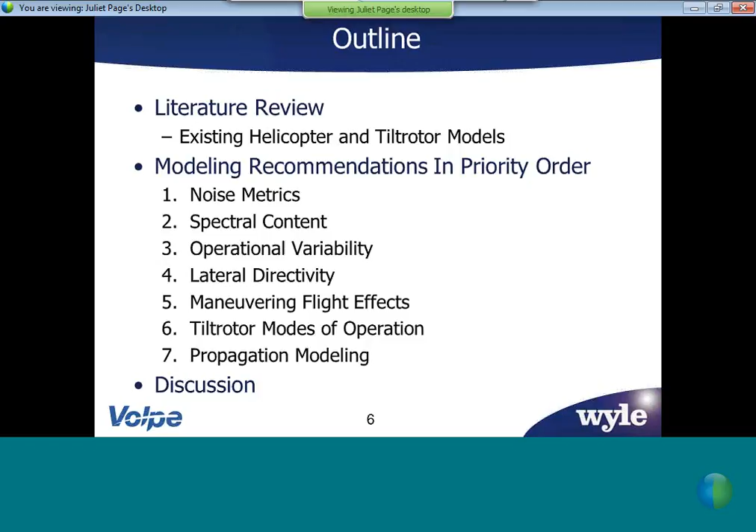Okay, so back to the models that are out there. There's a wide spectrum of models. I'm kind of using air quotes here around the word models. Everything from very simple operational guidance in the form of the graphics from Fly Neighborly. That in and of itself is a particular model for helicopter noise.

All the way through integrated models, simulation models, then there's first principles calculation methods that utilize a combination of computational aeroacoustics and dynamics models together with one another. And those are much more complex, and have a lot of input burden in terms of what information you need to even run the models. So there's this wide spectrum of models out there. They all have their pros and cons and varying degrees of accuracy and user input burden.

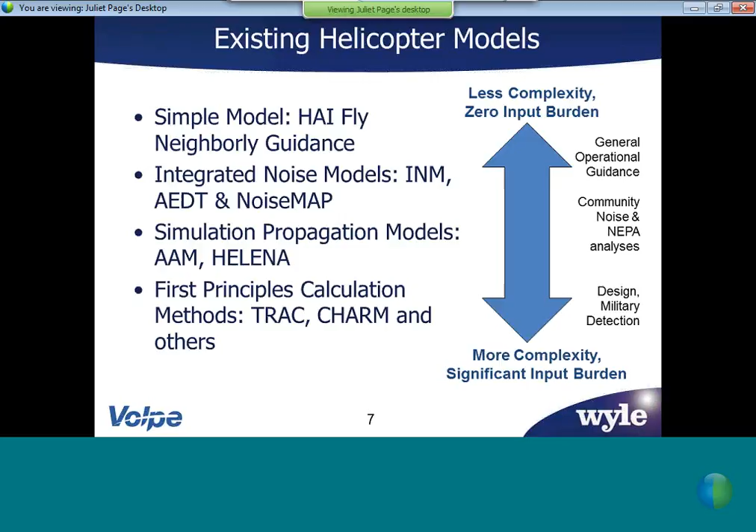And so in this project, we reviewed all of those. And since we're targeting AEDT, the integrated noise model, sort of in the middle, that a community noise modeler can use and have access to the data to use. Some of the higher fidelity models are very good for assessing, if you improve this or add this feature, what does that do to your answer? So anyway, let me just step through them quickly.

So as I mentioned, this is straight out of the Fly Neighborly Fly Higher chart, and it is a model. It's a very simple model where you look at your height above the ground and whether you're a small or large helicopter, and there you get your noise level out. Very simple, very easy to use, and a lot of people find this very valuable.

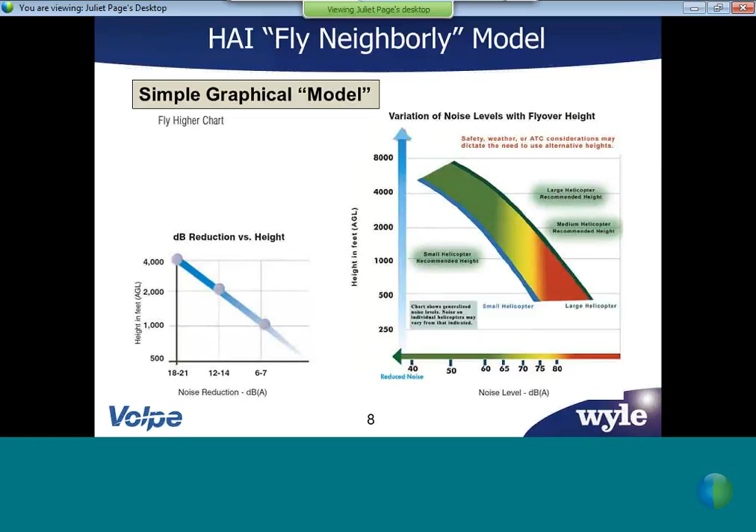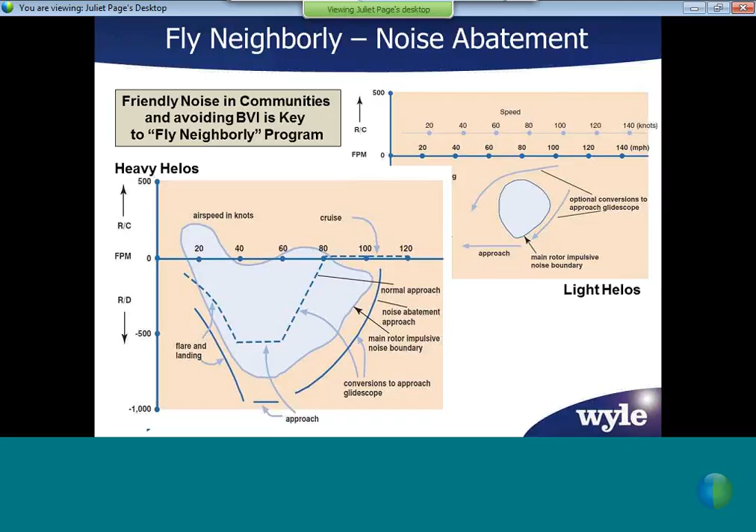Stepping up a little more complex, you can account for the BVI, and the HAI Fly Neighborly program also provides information to the pilots so that they can start to understand some of the noise source emission and can be aware of the community noise aspects.

Then we get to the integrated noise models. INM, which I'm sure many of you have been using over the years, as well as AEDT, which is the current FAA model. INM will be sunsetting in the future, so everything will be moving to AEDT. But that's an integrated model, and it has a GUI with it, and the user can define the operations, select the vehicles.

It comes with a built-in database, and there are some limitations to the fidelity of the source, the modeling, and the operational modes within that model. And this is where the crux of our recommendations are targeting. So what particular aspects of AEDT can be improved in the future to have better, more accurate noise results coming out.

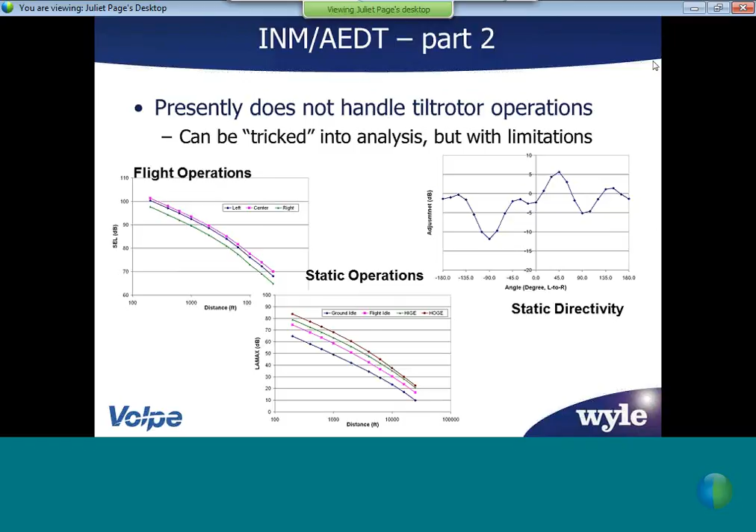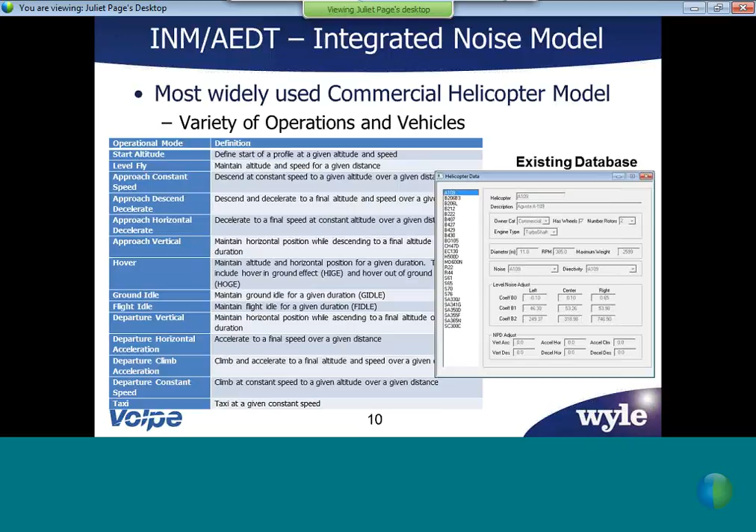So here's some of the limitations of INM and AEDT, which you guys are probably fairly aware of. It doesn't handle tilt rotor operations. You can sort of trick it to do them. It ain't pretty, but you can get some answers out. But as well, on the helicopter side, there's limitations on the directivity of the model. So you can have a left, center, and right directivity. There's built-in spectral classes. And there's a finite number of just a couple of different operational modes which have specific noise data with it.

So moving on to the next layer fidelity model, you get into simulation models. The Rotorcraft Noise Model and Advanced Acoustic Model at Wyle are examples of those. And I was instrumental in the development of those for many years before I went to Volpe. So these have at their core noise spheres, and you have one noise sphere that represents the 3D spectral emission for every single type of flight operation or flight condition. You can also handle stuff like maneuvering and other aspects which are a little more complex than what is currently in AEDT.

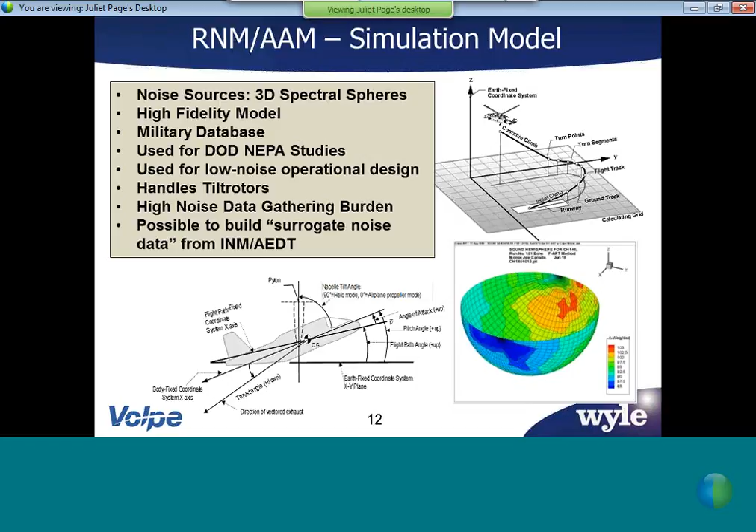There's also HELENA, which is an EU model. There's a lot of similarities between HELENA and the Rotorcraft Noise Model and AAM in the US. They are both time-based simulation. HELENA can utilize noise spheres, and it has the ability to handle noise carpets as well. And NLR in our team is one of the supporters or co-developers of the HELENA model.

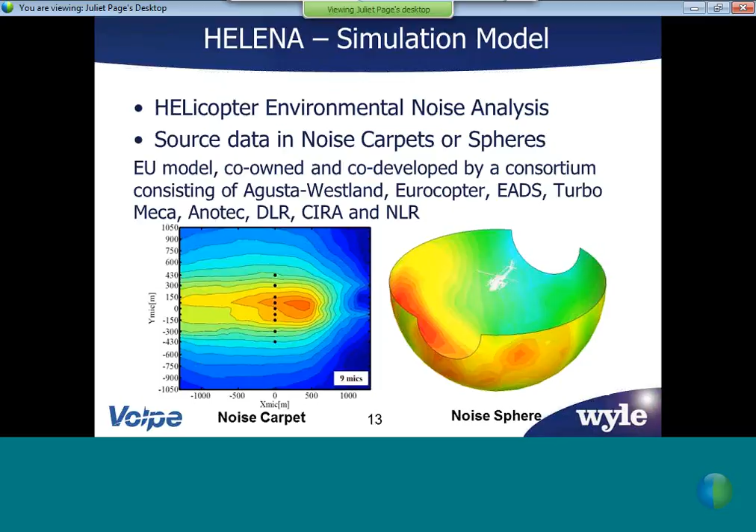Now, stepping to a little more complex process, there are tools like TRAC, the Tiltrotor Aeroacoustic Code, which is a NASA tool that is a hybrid code that uses computational structural dynamics along with computational fluid dynamics, and it has the capabilities coupled together. To utilize these types of models, you need a lot of information about all the blades and the airfoil shapes and the blade dynamics and properties, and there's a whole lot of information you need to be able to utilize these types of models.

And they're great for research and for analysis and other things, but it's way more data than your typical community noise modeler that's doing some sort of a NEPA assessment at a heliport or an airport or some other location would have. But these are very instructive for development of data and understanding the high fidelity physics.

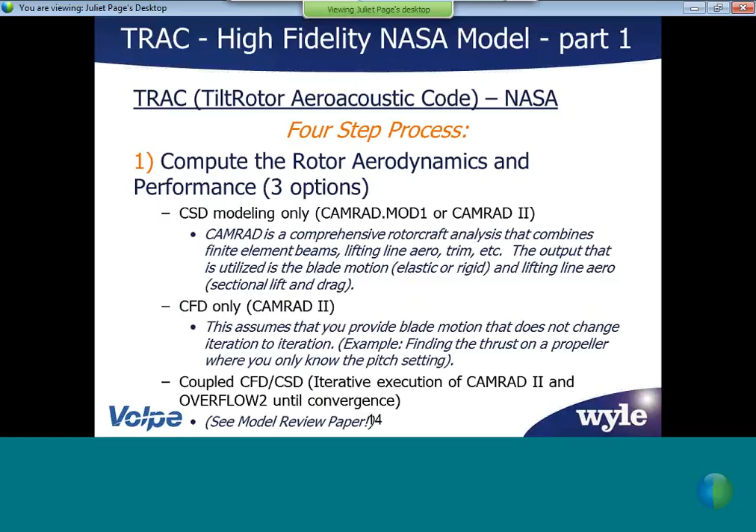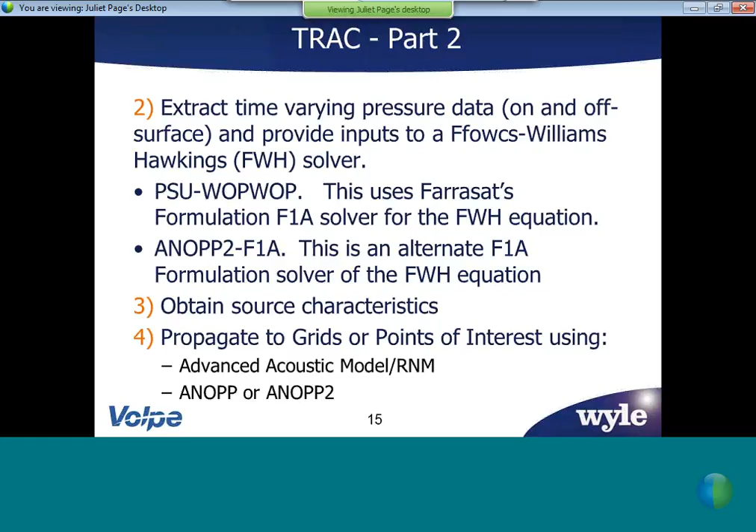So they work generally by starting with the rotor aerodynamics and the performance, and then they're coupled together, and you extract the time varying pressure, and use a Ffowcs Williams-Hawkings solver like WOPWOP or PSU-WOPWOP or ANOPP, which has Farassat's formulation in there. And from there you can obtain the source characteristics, either propagate it straight down to the ground, extract a noise sphere, what have you. And then these higher fidelity models can be used analytically to generate noise source characteristics that can then be used in the lower fidelity models as well.

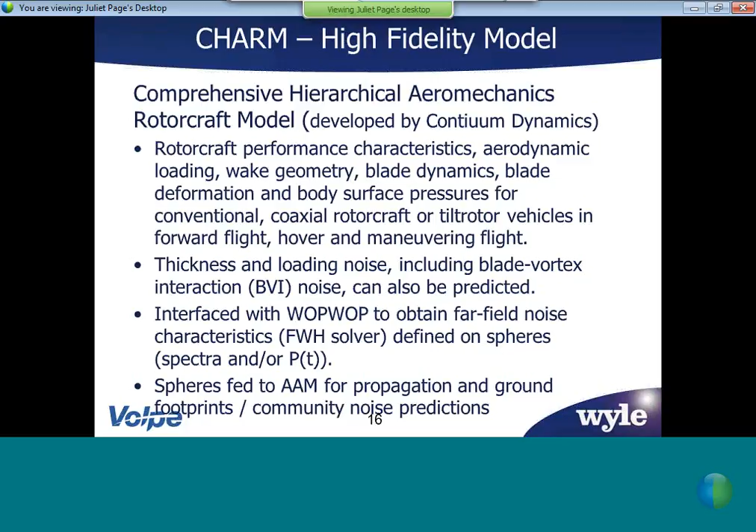CHARM is another example of a high fidelity tool. This one is developed by Continuum Dynamics in New Jersey, and it also has the capability of doing the aerodynamics and the blade structural dynamics, and from there extracting the noise characteristics. You can propagate straight down to the ground or feed them into a propagation model that takes into account additional atmospheric and intervening environmental parameters for the propagation. So there are many others out there. I just picked a few to show you. CHARM has the ability to also handle multiple rotor systems and other kind of cool looking crazy vehicles.

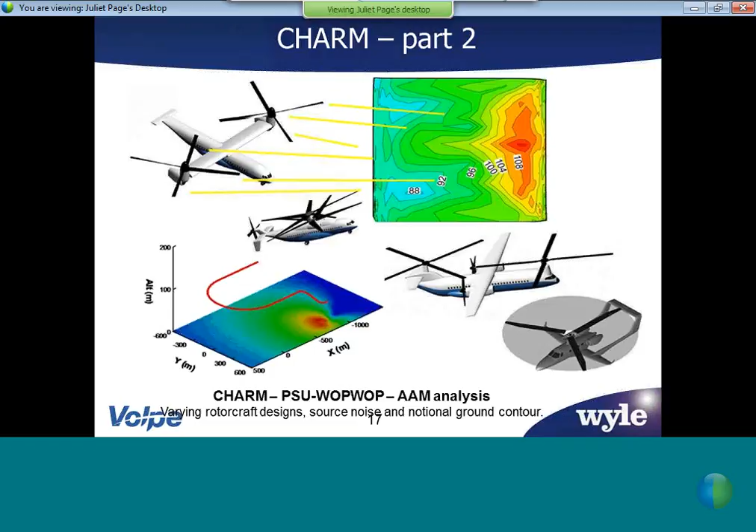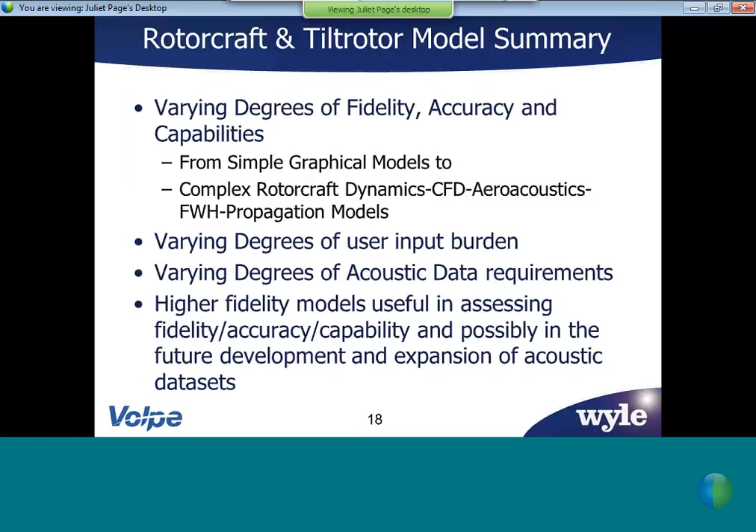So, as I mentioned all along, there's varying degrees of fidelity, accuracy, and capabilities of the models that are out there. And we're targeting community noise modeling. So again, with a lot of these models, it's good to understand them. It's good if you have access to them, if you need to develop databases or you have a limited empirical database and you want to augment that with some analytical stuff in between. Now I'm going to move on to our recommendations. And I have 7 slides for each of the key recommendations, and I'll go through each one of them in order.

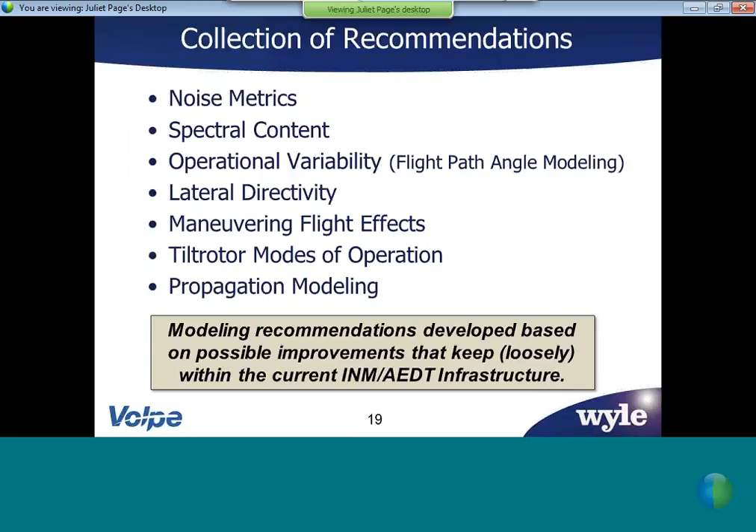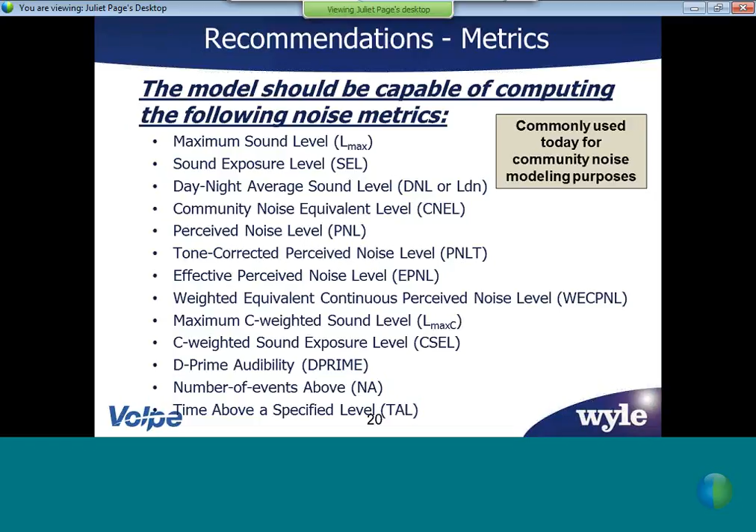Okay, moving on to the next priority here was spectral content. So the current model of INM stops at 50 hertz and goes up from there. And as you're all likely well aware, the fundamental noise for helicopters is generally below 50 hertz. There can be some significant differences in the computations.

If you do not include the fundamental and the first few harmonics of the rotor fundamental, when you're computing C-weighted, unweighted, metrics like D prime, which is an audibility metric that occasionally is used for Grand Canyon and National Park studies. So there can be significant differences. So that is the genesis for our recommendation that spectral content be included in the model down to and including 10 hertz, 1/3 octave band.

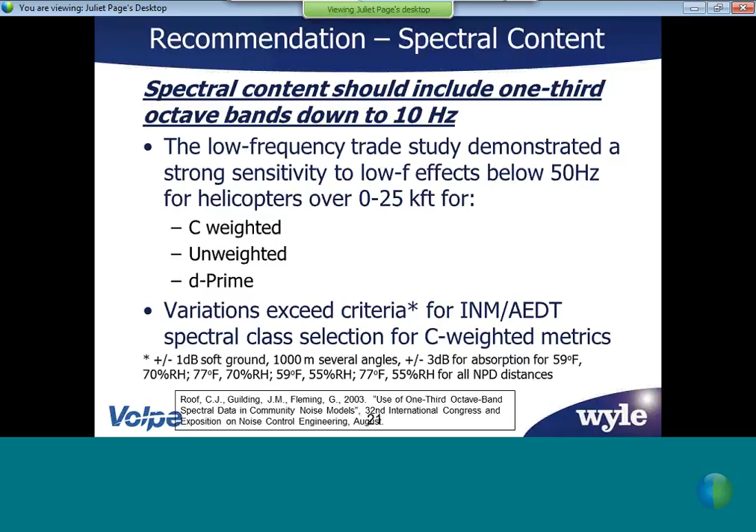Here's an illustration for those of you that may not be fully plugged into the A and C weighting details. On the lower left here, I'm not sure if you can see the pointer, but this is the C weighting curve, and this is essentially the weighting that gets applied to each frequency, and then the noise gets integrated across all bands. A weighting drops off significantly at the low frequencies.

A weighting is essentially a capture of the human ear and human hearing, and we don't hear a whole lot of the low frequencies. Whereas C weighting is often used to determine vibration and structural response for buildings and things like that, and they do respond well to low frequency noise. So it's fairly flat all the way down, well below 50 hertz, and then it starts to roll off. So all of this energy in the purple area is not currently included in the C computations in INM.

The current version of AEDT does have inclusion of capability to go down to 10 hertz. The databases are going to need to be expanded, though. On the right-hand side, I'm just showing an example of a spectra for the Bell 412 and the Canadian Forces CH-146 vehicle that was measured at Moose Jaw. This is publicly available data with the Rotorcraft Noise Model, and from there you can see the peak noise, the fundamental for low speed and high speed, is well below 50 hertz.

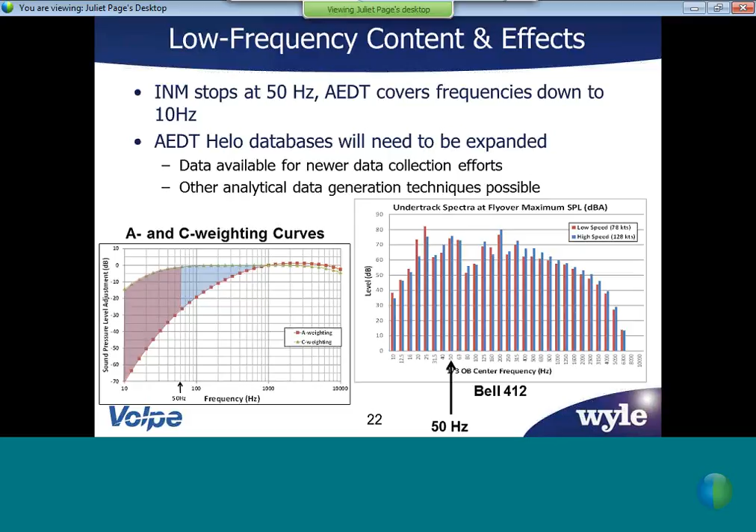Okay, moving on to the next recommendation. This is flight path angle. So we recommend that it's necessary to include the effects of approach flight path angle on source noise characteristics. So, as I'm sure I'm preaching to the choir here, BVI on approach is a major noise emission condition, and helicopters generally on 6 degrees approach, they're at maximum BVI. Obviously, there's configurational differences and operational differences, but generally there's a peak around 6 degrees.

If a pilot flies a low noise approach at 3 degrees or 9 degrees, they're off the BVI maximum, and their noise source emission, looking at the source characteristics, is lower. The way the AEDT and INM model is currently structured, it has one set of approach noise characteristics per vehicle.

So if you are attempting to model a low noise approach or design a low noise approach for your facility that will reduce the noise on the community or reduce the contour size in a particular area, you're never going to be able to see the benefit of that in the model the way it is currently structured. So that's the primary rationale behind a recommendation that you need to include approach flight path angle source characteristic variability within the model. Otherwise, you're kind of throwing the baby out with the bathwater, so to speak.

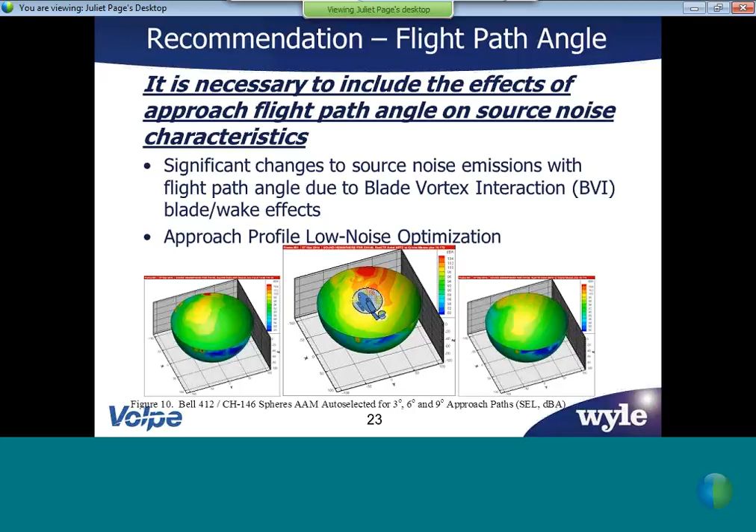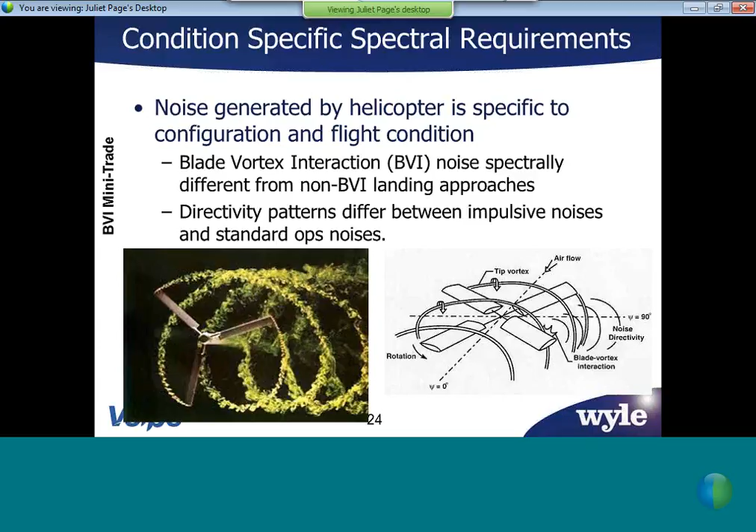Okay, we also feel that it's important to include the spectral characteristics along with your approach noise. So the current implementation in AEDT is to have a single spectral class for approach, one for departure, and one for level flyover. Because the BVI noise versus the non-BVI conditions can have dramatically different spectral characteristics, it's important that you permit the spectra to change and not just the overall level to change as a function of flight path angle.

Those are just some cool photos of BVI, what it is, when it occurs, and why. I'm not going to get into a whole lot of detail on that here. We don't have hours and hours to go through BVI noise, but there are conditions, different loading, flight path angle, drag or thrust state of the vehicle that can affect the relative angle between the rotor wake and the blades, which will impact BVI or not. So it can be condition specific as well as vehicle specific. And it's important to be able to capture that adequately.

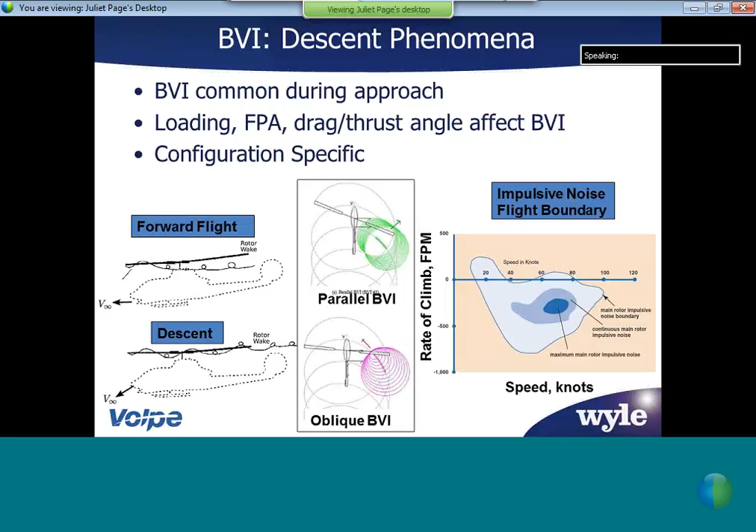Okay, moving on to the next highest priority item is lateral directivity. So the noise emission from helicopters is fairly complex. It is not symmetric like fixed-wing aircraft. The current AEDT and INM models were developed to have a limited amount of lateral directivity. They recognized that the right, the center, and the left are different for helicopters. So it has essentially 3 lateral directivity points: center line, directly under track the vehicle, right and left, which are defined at a 45-degree emission angle.

If we look at the higher fidelity noise source emission of vehicles, the peak may not necessarily be at 45 degrees, and there is often noise emission that is at higher angles heading up the side of the, if you picture the sphere, heading up towards the rotor plane. You know, if you're flying above uniform flat Earth, those probably aren't a big deal, but once you start to bank the helicopter or try to do an analysis where you may have terrain or helicopters flying below the height of nearby canyons or other features, you've again missed a lot of the noise characteristics. And we feel it's important that the model do have more lateral directivity fidelity in it.

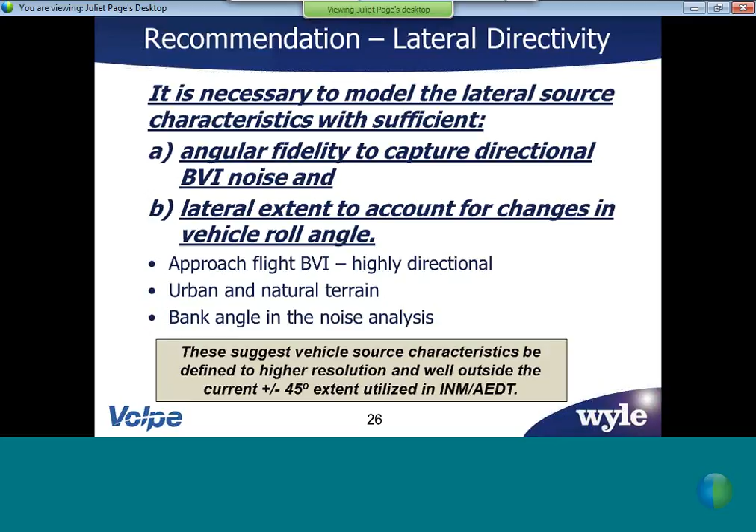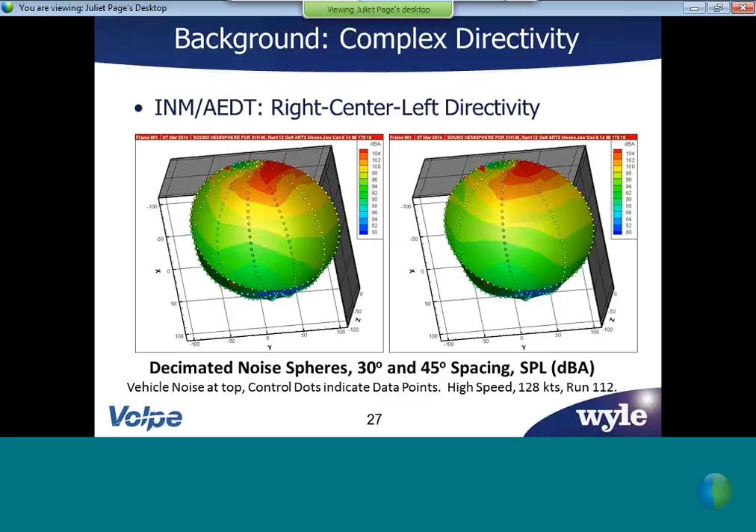So here's just a few examples. One of the analyses we did was take the high fidelity empirical noise spheres, essentially decimate them, lower and lower fidelity, and assess what the impact was on the contours and integrated noise metrics, and use that to quantify some of the differences of including it versus not including it. And a lot of the details of this are laid out in the white paper. Right now I'm just going to give you a pretty high-level overview.

So you can have a single event dBA level off by upwards of 7 dB, just by neglecting to include some of the lateral directivity effects. And again, this is just one example, one flight condition, one particular thing. There's some more examples of this in the white paper. But this is the genesis for that specific recommendation, that one needs to include higher fidelity lateral directivity in the model to more accurately capture the noise.

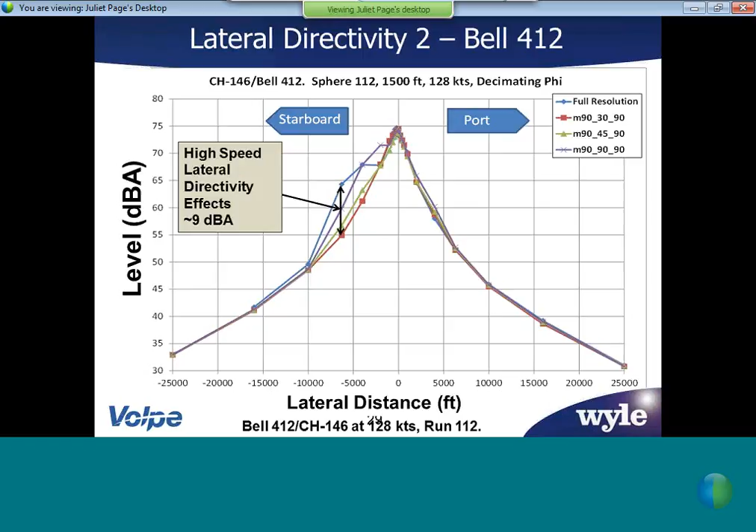So there are implications to this lateral directivity modeling recommendation. Our suggestion is that we leave it up to the manufacturer to define what angles need to be prescribed. That is going to be very vehicle and condition specific, and the manufacturers probably have modeling that they've done in-house to better ascertain this.

We think that the criteria for saying how many lateral directivity positions or angles need to be defined should be parallel to some of the current FAR 36 language that specifies how different things can be between the lateral microphones to capture the maximum. So there's probably some current language out there that could be woven into this lateral directivity recommendation. And if anybody has suggestions, we welcome your input on that.

For level overflights, left, center, right might be okay, but the peak might not be at 45 degrees. So rather than just having the finite left, center, right at 45 degrees, say, okay, here's the left, here's the center, here's the right, and specify what the angle is. We've had some preliminary discussions with the AEDT developers about what that would require in terms of modifying the tool to handle N angular locations, and the NPD metrics would then be at each of the N angles, and possibly have an N maximum or something like that.

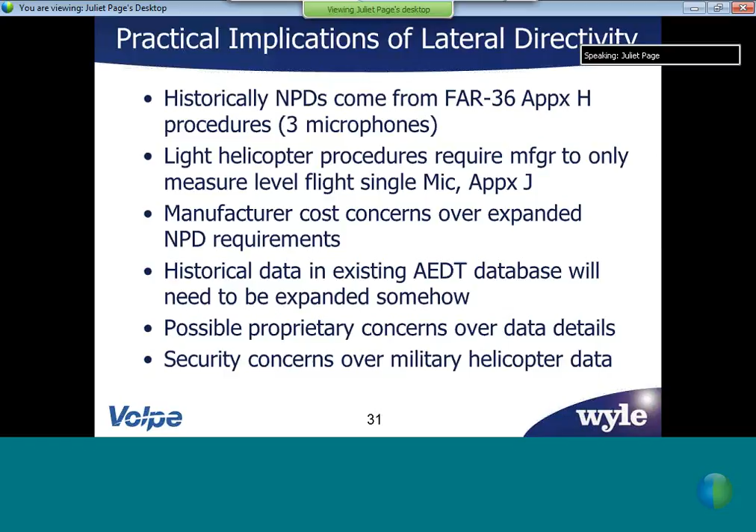Okay, the next recommendation, and this is a little bit of a softer recommendation, is that the model should be structured so that it can handle maneuvering flight. There's a couple of different categories of maneuvering flight here. So one of the pieces we feel it's important that a community noise model capture is the ability to model optimized low noise profiles. So for example, if you have a drag device that you're putting on there, like Fred Schmitz's X-Force, you can avoid BVI. Or if you have some other vehicle designs coming down that will take into account different drag states or what have you, that you can actually include the source characteristic modification.

Now, that's not to say that the database needs to include all of these things, but you need to give the user the capability that if they're attempting to model a scenario at a particular vertiport or airport, and they know that this vehicle will be in use, that they have the ability with their own customized data or whatnot to be able to model that in the tool. In the way it's currently structured, that's very difficult, if not impossible to do.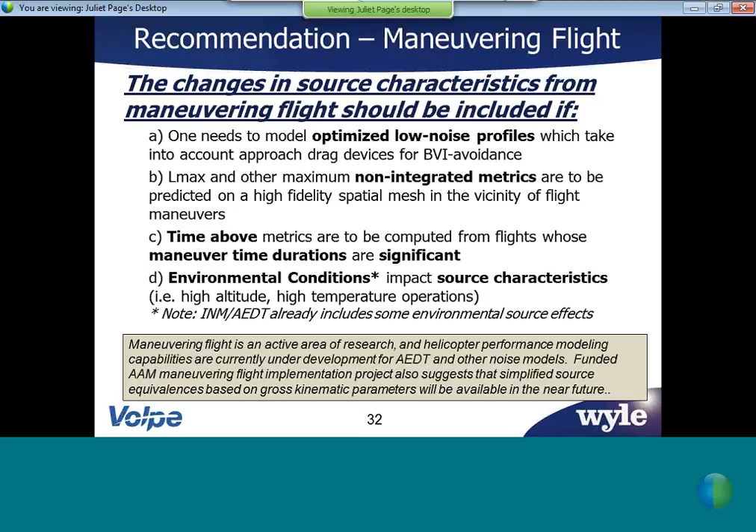Okay, and finally, tilt rotors. So tilt rotors were not the focus of this, but we did want to give them some due diligence and address the tilt rotor configuration here. So one of the things we did was to try to run a tilt rotor analysis using the existing INM. So how can you trick INM into running a tilt rotor?

And you can see the effects of that, us doing gymnastics to run tilt rotors in INM, in the full white paper. And obviously there's a lot of challenges to do that, a lot of tricks where you're running separate segments and you're adding grids to get the overall answer, which is not slick. It sort of works, but there are certain limitations that it has. So with the hopeful future introduction of tilt rotors into the commercial arena, the model needs to be able to handle tilt rotors.

So there are different flight modes, including transition, which just don't exist for fixed-wing or helicopters. And associated with that, the movements and the associated noise source database need to go with that. So we've identified several of the modes of tilt rotors that need to be handled: hover, takeoff, flight, transition, and different types of flight modes. They each need to have their corresponding spectral class and noise source characteristic information.

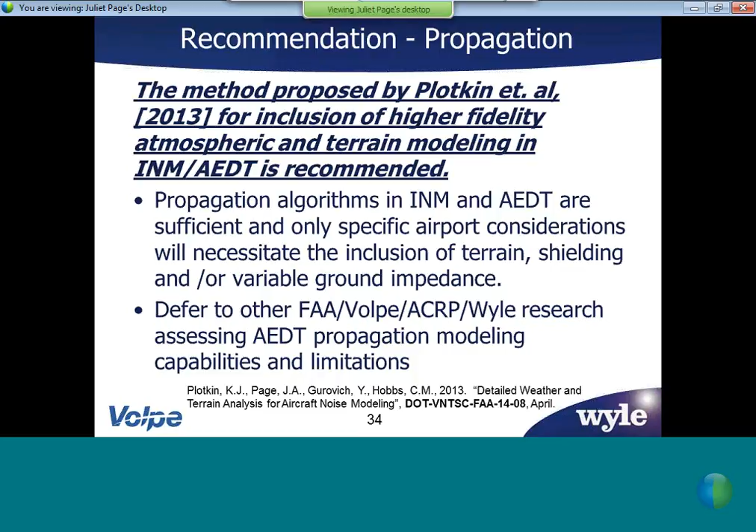So for this particular project, we're essentially saying, yeah, all of these other recommendations of improvements in atmospheric absorption, layered atmospheres, being able to handle intervening terrain, and the next step after that going to curved rays with more diffraction capability, those are equally applicable to helicopters and tilt rotors as well as fixed wing. So those are our key recommendations.

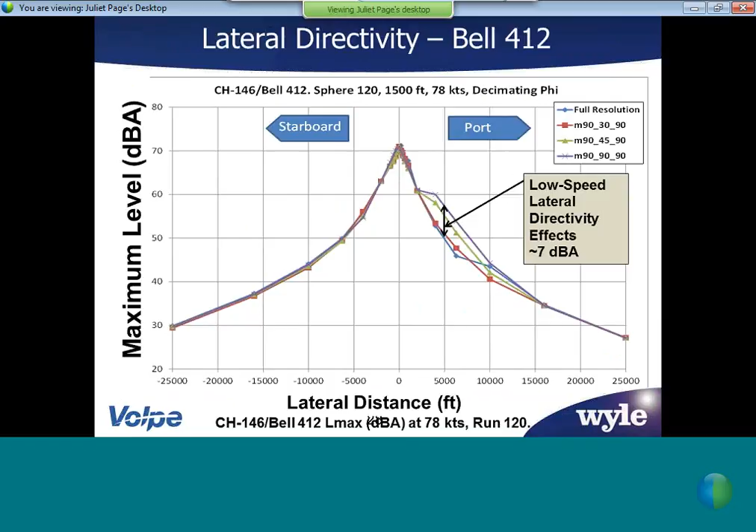In one of the slides, it seems like you were letting the manufacturer define the directivity effects, and that implies the number of mics. But also, what's the oversight if we all play the game of what's best for our aircraft? What's the oversight by the FAA when they get these directivity effects? Will it be, okay, show me the data that you got this from, so I can make sure that you captured the correct directivity effects, or is it going to be just, okay, this is what you say it is, we'll believe you?

Right. So I hear you on that. So my suggestion there is to word the criteria in a way that's parallel to the FAR 36 language. And forgive me, I don't remember the wording, but if you look at fixed-wing aircraft in FAR 36, they have a series of lateral microphones that have to capture the peak for a departure.

There is language in there that specifies how many you need and where you need to put them to ensure that you've really caught the peak and you haven't just placed it so that you're missing it and fudging it, in layman's terms. So there would need to be some language similar to that that would ensure you've defined it in such a way that one can't play games. Okay. That's kind of what my second dash there is aiming at, although I probably didn't word it as well as I could have.

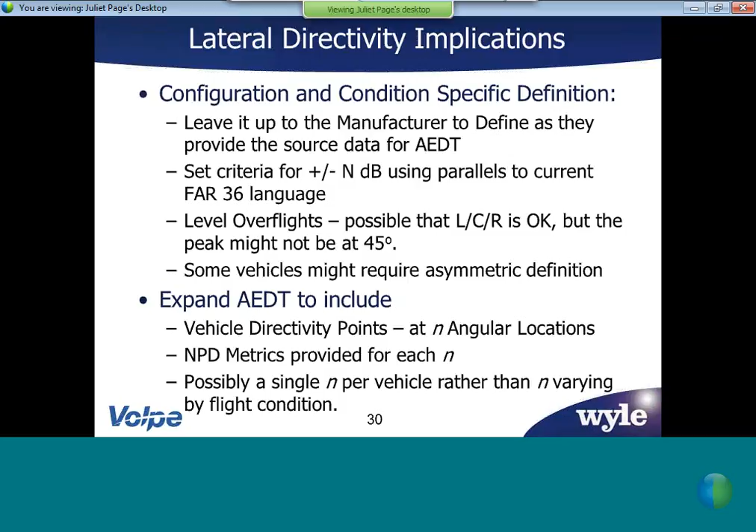Juliet, this is Eric Jacobs. So you're really talking about an expansion of FAR 36? No, I'm not talking about expanding FAR 36. I'm talking about making modeling recommendations, but the language that goes in the modeling recommendations might parallel some language that's already existing in FAR 36. Okay.

Also, the question: so far, everything that you've been talking about is constant airspeed conditions only? No, the maneuvering is attempting to address the non-constant airspeed, so accelerations and decelerations and other types of maneuvers. Again, I'm not really sure how far down that rabbit hole we should go with this first set of recommendations.

You know, my pragmatic side says, let's touch on it, let's lay a framework so that maneuvering flight and some of these effects can be considered, but maybe not prescribe it in nth detail, because that is currently active research, and I think the jury's still out on where and how far you need to go on that. I think we're probably a little premature to pin that stuff down. At least that's my personal opinion. Unless, obviously, you guys have probably thought a lot more about that than I have.